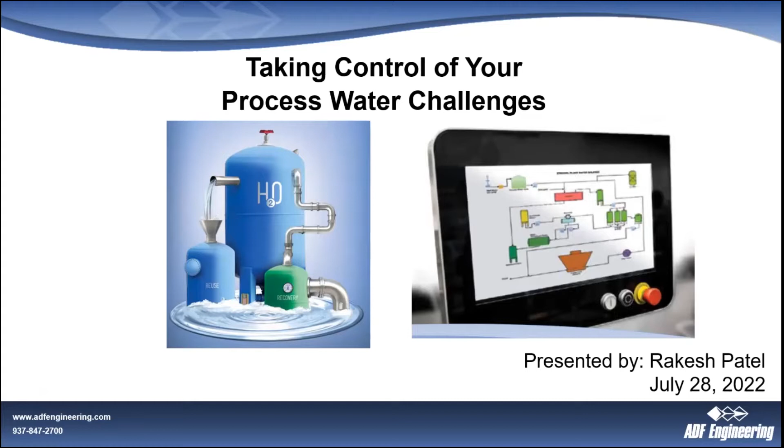I'm going to delve into approaches on how you go about tackling water challenges, how flow diagrams are useful, and how benchmarking is very useful when you're looking to handle issues and make improvements to your water energy systems. I'm going to bring up some specific process improvements that could help reduce water use, and discuss water treatment equipment and associated improvements. Then I'll touch on how water and energy are tied together, and how pinch analysis is useful for reducing both your energy footprint and your water footprint, and identifying streams that can be reused for beneficial use within your facility.

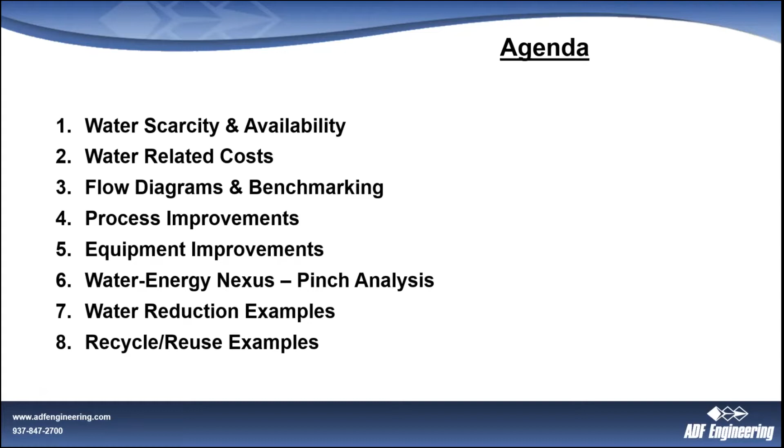So what does that mean for your facility? It may mean production slowdown, or in the worst case, shutting down your facility because you don't have enough water, or you're not allowed to draw the water needed to operate. You may have additional restrictions on discharges, or it may be cost prohibitive to get fresh water or discharge wastewater. And that is impacting your production facility in some way.

And that's a business risk, right? Almost everybody has experienced higher costs of bringing in fresh water, higher costs of treating wastewater, and costs related to the volumetric disposal of your wastewater.

It may also mean that you've gone over your permit limits somehow. In the best case scenario, it means wherever you're discharging the water, you're paying a lot of surcharge because you're not meeting a permit limit. But in the worst case, it may also mean that you've got notices of violation, and a notice of violation can shut a facility down. So that's another business risk.

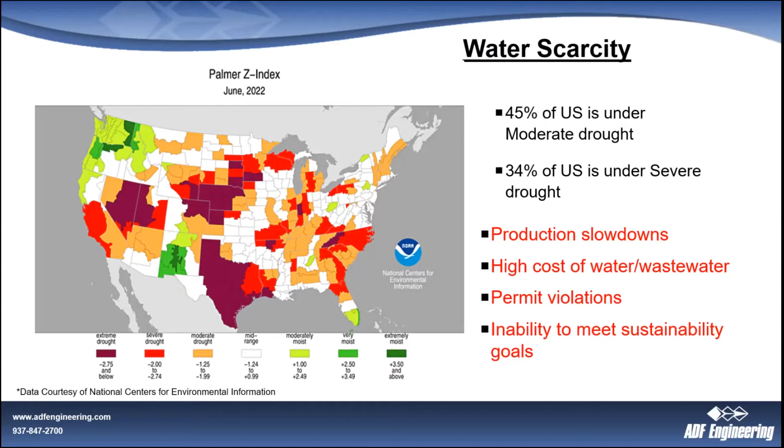So what does it mean when you're looking at water and sewer costs? A lot of the time people only talk about the water bill, which includes the charges if you're getting water from a municipal source and discharging it back to them, to publicly owned treatment works. You get a water bill almost every month, every quarter, whatever your period may be, and you look at that.

But water related costs are not just the water bill, right? There is energy cost in heating and cooling the water. A lot of water streams require treatment, so there is chemical cost associated with treating the water. And if you're disposing it off, a lot of those chemicals are going down the drain. And then finally, you need labor to operate your water treatment equipment.

If you have larger use of water, that is probably a higher labor cost, and then OpEx related to keeping up with the equipment, maintenance, and replacing equipment and things like that. So wherever there is chemical or energy associated with water, those costs are several times, order of magnitude higher than what just shows up on the fresh water bill.

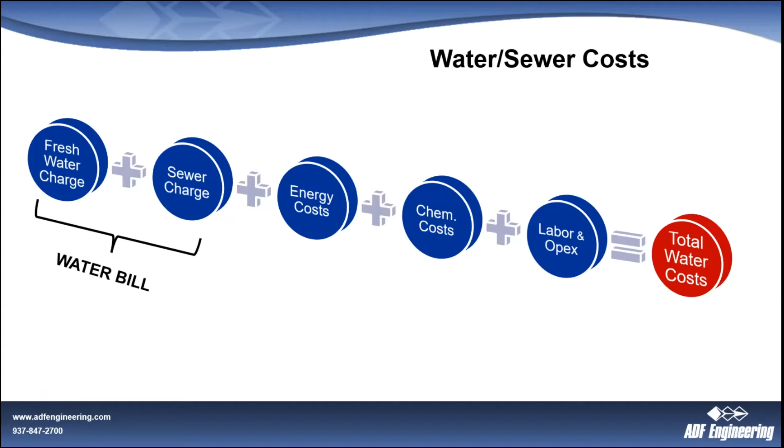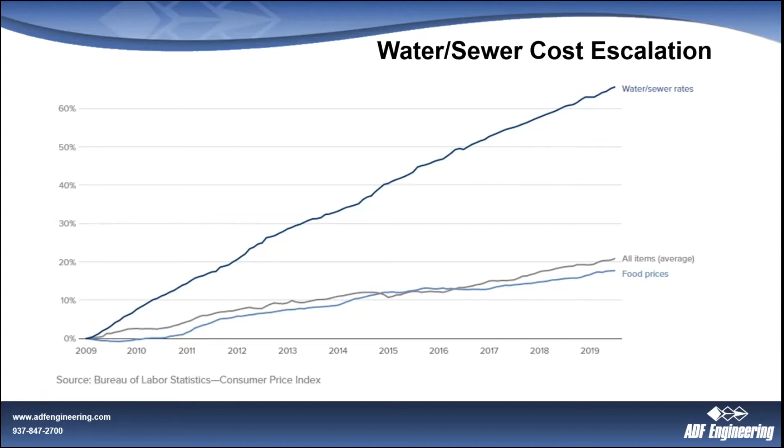So where do we start? If you want to look at your facility, the first place we recommend starting is doing some kind of water balance or benchmarking. Do you know the different flow rates for different streams of water that come into your facility, are used in the process, or go out? What is the specification in terms of the quality of water needed, whether you just need to remove hardness, whether it needs to be DI quality, whether it needs to have certain pH and dissolved solids, things like that.

Do you have meters installed for different areas like chillers, scalders, wash cabinets, evaporators, condensers, and process users, or not? The water usage may also vary, high, low, average, based on your production scheduling, based on the time of year and seasons. Is that documented or not?

It's been our experience that many of our clients can reduce thousands of dollars of water and sewer related cost just by evaluating their flow diagram. A lot of times it is a matter of finding leaks that you didn't know about and fixing those leaks, but also optimizing the process and equipment, which we'll get into more detail here shortly.

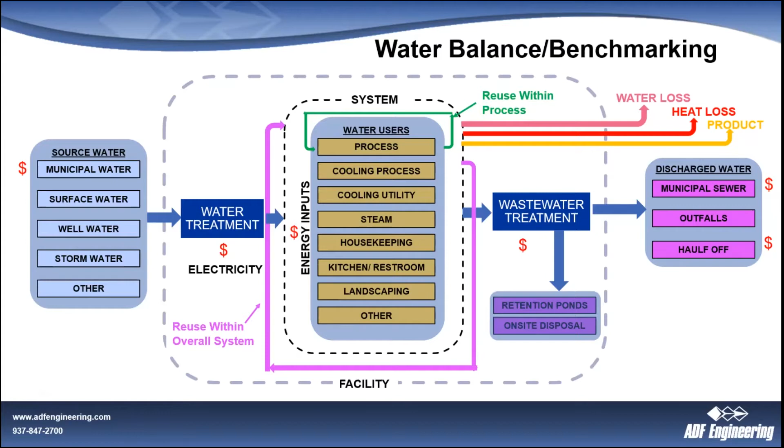So this is the overall water flow diagram for the entire facility. Once we do that, we can dig deeper into individual processes.

Just measuring the flow is not enough to look at the whole picture when you're trying to look at water plus energy and trying to identify opportunities to reduce your use and recycle and capture a lot of the energy content before it becomes a waste stream.

So in this process, first up, you're using steam for the final process heating. You take the condensate and use it for reclaiming some of the energy in one of the heat reclaim systems, and you return that condensate hopefully back to your boiler feed tank.

You can take the residual heat that's available in your product, shown in the black lines, your product reclaim heat exchanger, before the product flows out and needs to be cooled.

You may use flash steam in your facility for preheating, and then you do your final heating with actual live steam. The condensate that comes out can also go through heat exchange.

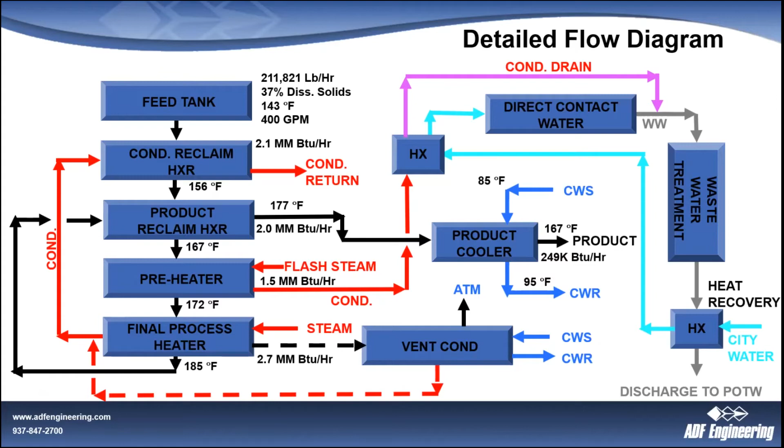So, process improvement. By process improvement, I mean your manufacturing process or the core process that you do in your facility, your water quality requirements, the volumes you're dealing with, and your space and budgetary constraints. These are all considerations in order to identify opportunities for process improvement.

First and the easiest one is to look at the CIP that you use for cleaning your pipes, tanks, and other process equipment. We see a lot of places using concurrent flow cleaning, meaning they're using fresh water for each and every step, and that water ultimately ends up as a wastewater stream. A lot of the time the vessels you're cleaning are hot, and this wastewater also has energy content, which all goes down the drain.

Sometimes this causes issues with underground drains, which may not be suitable to take hot streams. That problem can be rectified by doing a countercurrent flow cleaning, meaning you use your cleanest water stream for the final cleaning, flowing opposite to the way your product flows, so you go from cleanest to dirtiest, and that stream becomes the waste stream that is discarded. You can still recover energy, but the waste stream may go to a water treatment facility. Or you can look at a multi-tank system instead of a single tank system for doing your CIP.

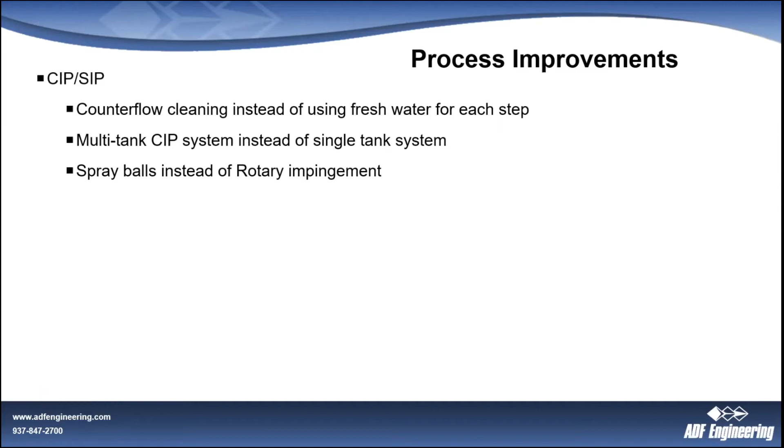Next, you can look at your heating and cooling loops, closed circle loops, and evaluate how much energy is needed to get to whatever specs you need for your process, product, or interim steps, and optimize this loop. A lot of places don't have very good control for the heating cooling process. It could be as simple as replacing a ball valve with a manual throttle valve that can control the flow, or you can put in automatic flow control and PLC-based control, depending on how complex your application is. That way you're not doing on-off controls, and you're optimizing your flow to get nearly uniform performance.

You can upgrade your existing process equipment with newer design technology and use less water. Sometimes you can use enzymes or pH adjustments for degumming, which uses a lot less water instead of just water degumming. Again, not every application is applicable to every plant, so you have to study the requirements and design a tailored solution.

That is what we bring to the table, knowing we are primarily process engineers, so we understand processes and manufacturing. Then we can apply that knowledge to how to optimize the process and energy streams.

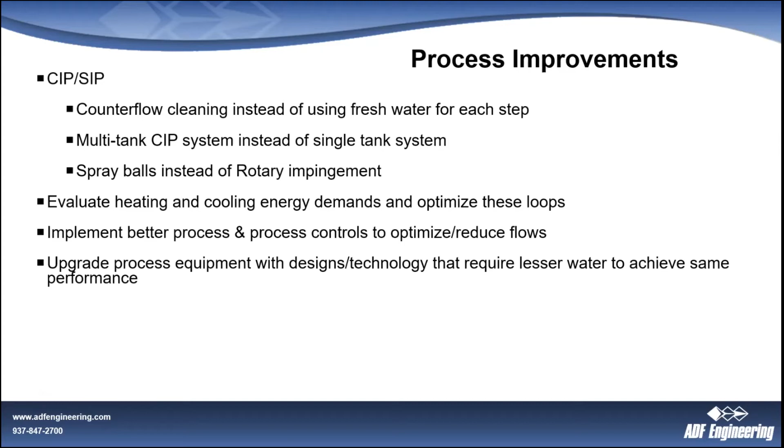So if you're drying products like starch, gluten, or fiber, mechanically and then thermally, you could probably use some chemical dewatering additives in the dewatering step to reduce the thermal energy needed. If you're washing vegetables and using steam for peeling, maybe you can look at mechanical, flame, or caustic methods for peeling, which will reduce your water consumption.

Also, a lot of facilities don't return all the condensate back, and you need fresh water to make up for the condensate, so you're dumping a lot of energy - that's easy, low-hanging fruit. You can also collect and keep solid waste out of the wastewater stream to reduce treatment costs and increase the reuse potential for that stream.

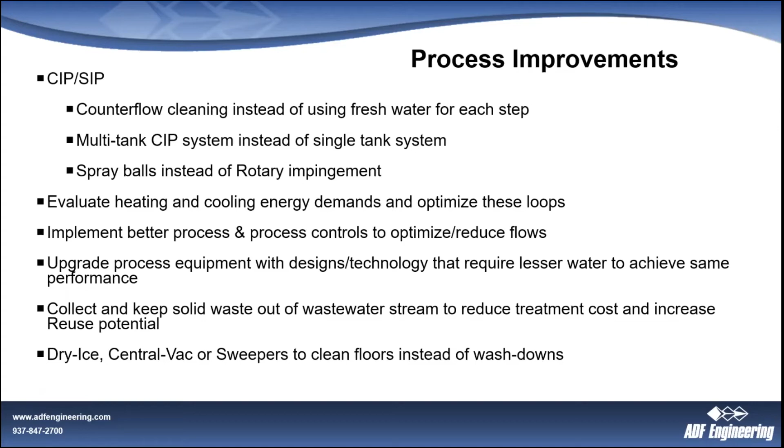I have a couple more here, but there's a lot of different things you can do to the process to reduce water usage, or find ways to reuse some of that water stream. Keeping employees informed usually helps out - if people know where water is going and how much energy you are using, they are usually more mindful and come up with ideas that help reduce water use.

Next, you can look at your water treatment equipment itself, find and fix losses - that's an easy one. Install low flow fixtures and flow nozzles so you're not using more water than needed, and customize your application. Repair and maintain, especially older equipment - we see a lot of older equipment in neglect.

Use optimal treatment based on your end water quality demand. An example I use here is that a lot of times vendors have sold RO systems for low pressure boilers that we see. RO systems are great - they produce great water quality, but they're also energy hogs. You need a lot of energy to pump water through the membranes, and you create about 20 to 25% waste stream that directly goes down the drain. It just increases your water cost exponentially, whereas for a low pressure boiler, softened water is typically more than enough to meet the water quality requirement without impacting boiler performance.

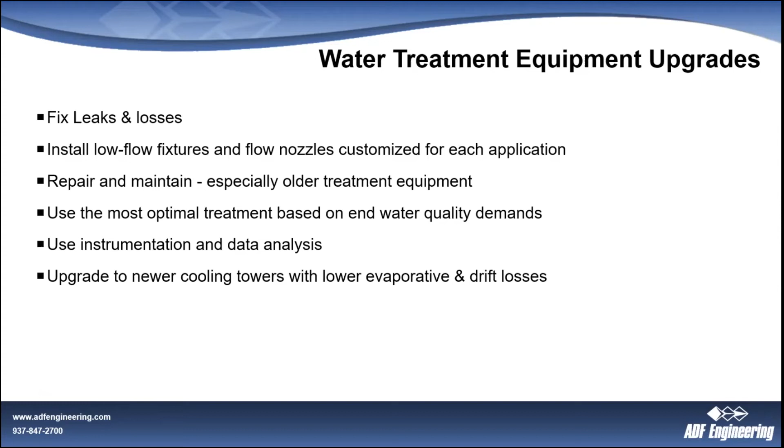Put in instrumentation, flow meters, analyze the data to see where water is going in and out, and that helps identify opportunities to reduce. You can upgrade to newer cooling towers, for example, to lower the evaporative and drift loss.

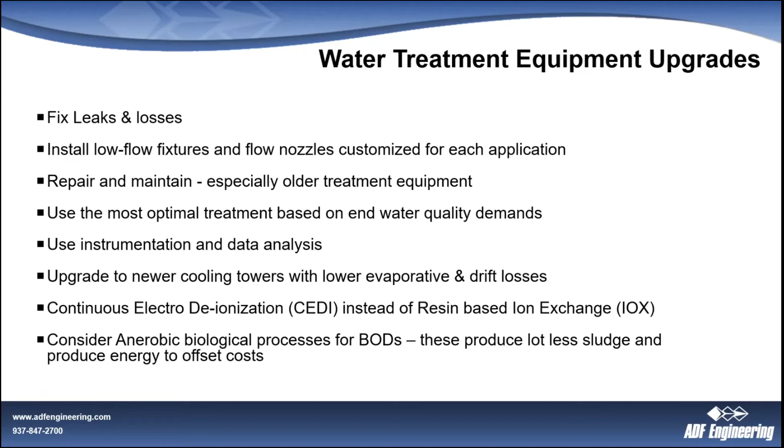If you use ion exchange and need deionized quality water, CEDI is a great option that does not require resin regeneration using acids and caustics. And then consider biological processes to reduce BODs and reduce the amount of sludge.

I'm going to get into pinch analysis a little bit quickly here. The red streams are the hot streams that require cooling. The blue streams are the cold streams that require heating. We can look at the temperature differential for each stream, the heat capacity, and what's available. The length of the bar is the temperature to and from that you need to get to. The width of the bar tells you the energy content that is available.

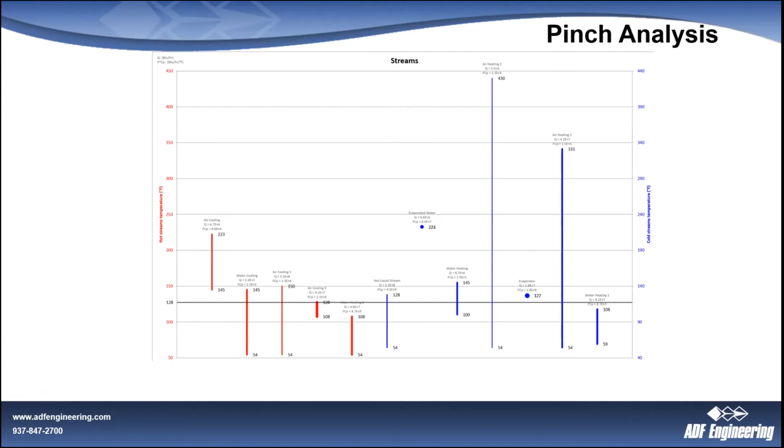When you feed this data into a pinch software, it identifies streams that are at identical temperature and have enough heat capacity available to do the heat exchange from one stream to another, recapturing that heat before the stream moves on to the next step or becomes a waste stream. We can match these streams up and extract as much energy as possible, and in the process, also reuse some of the water streams. So it's a combined analysis.

These are the quick steps of doing energy water pinch analysis. You identify the streams, you document the thermal data, temperature, flow, specific heat. You feed this information into pinch analysis software and pair up the streams that need heating and cooling, and then identify energy recovery using heat exchangers.

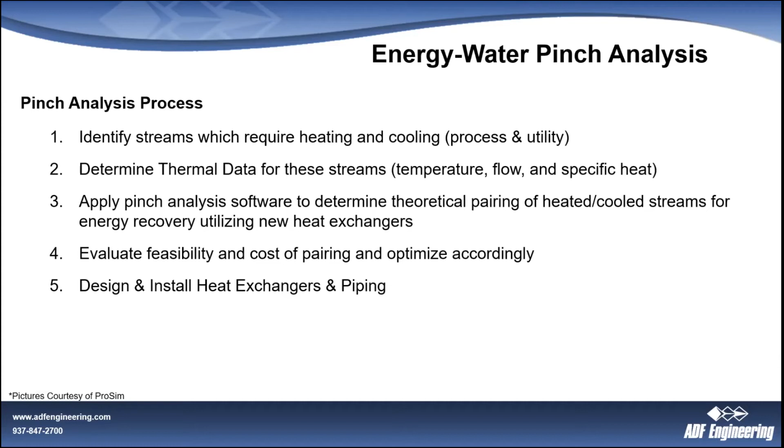Obviously, everything is a capital cost. So you need to evaluate the feasibility and the cost of pairing and optimizing, and then narrow down to the streams that make sense, both from a technical and fiscal point of view. Finally, once you've done that, you design the network of heat exchangers and piping to be able to capture this stream and reuse it.

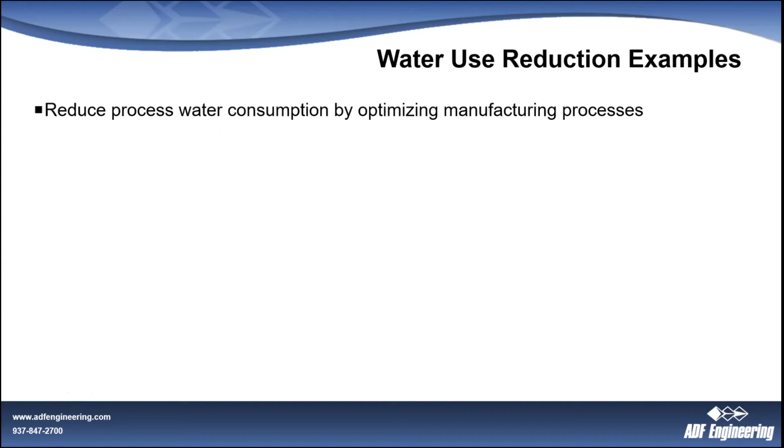Here are some examples of water reduction: reduce your process water by optimizing manufacturing process, reduce water discharge from treatment process, use softeners instead of ROs, optimize your CIP, and reuse water from one system to another. You may only be using it within the system, but there are often opportunities to reuse it in another system.

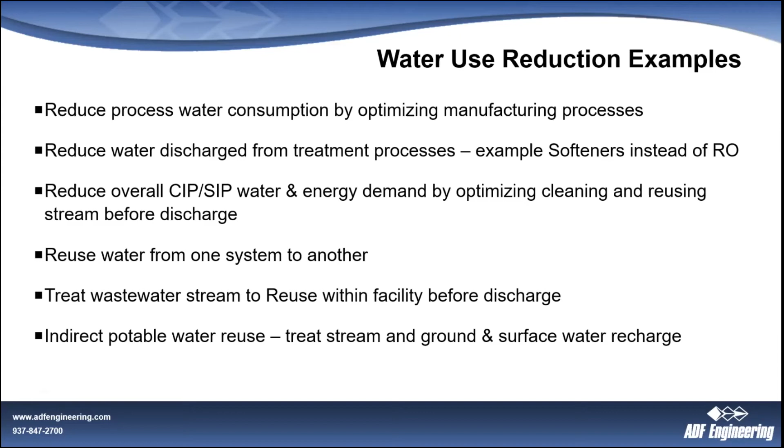Treat the wastewater stream to use within the facility before you discharge it. Finally, a lot of industrial facilities may not be doing this, but a lot of municipalities are starting to: treat the stream and then use it to recharge underground or surface water sources, which later becomes a potable water use application.

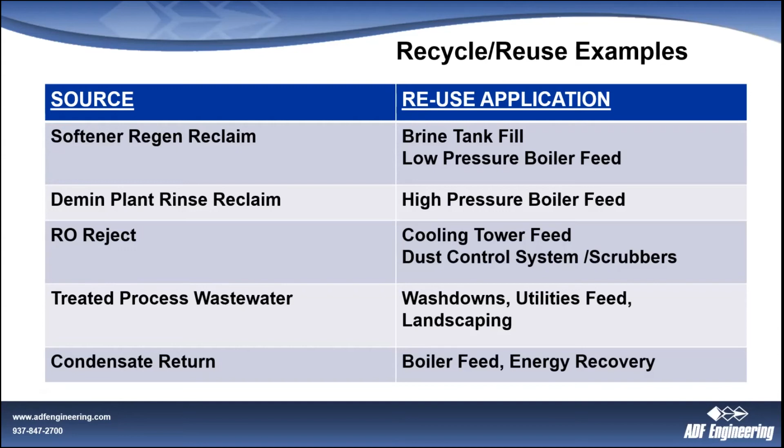So with that, I'll hand it back to Tim and we can take some questions.